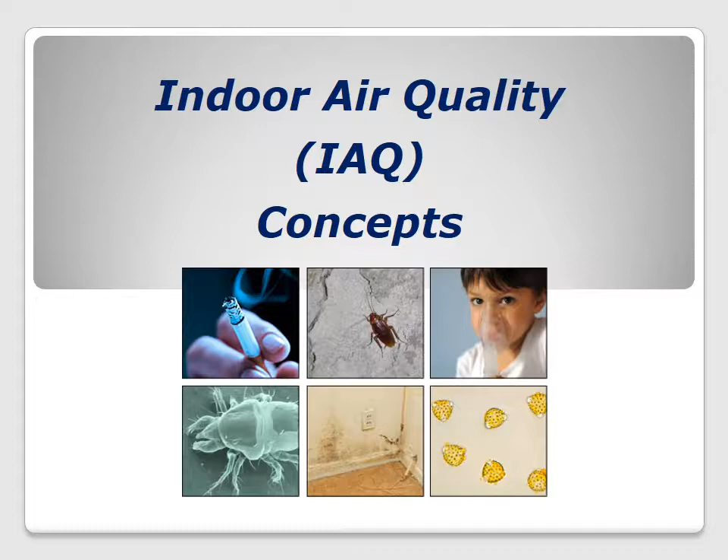In the last lesson, I quoted the stated purpose of ASHRAE Standard 62.2 2013. This standard defines the role of and minimum requirements for mechanical and natural ventilation systems and the building envelope intended to provide acceptable indoor air quality in low-rise residential buildings.

That's an interesting phrase in there. Acceptable indoor air quality. What does that mean?

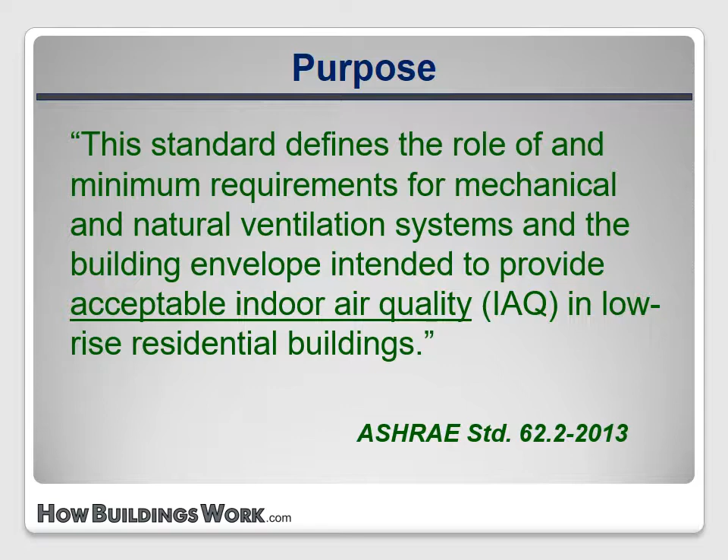Well, the standard defines it for us. It says acceptable indoor air quality is air toward which a substantial majority of occupants express no dissatisfaction with respect to odor and sensory irritation, and in which there are not likely to be contaminants at concentrations that are known to pose a health risk.

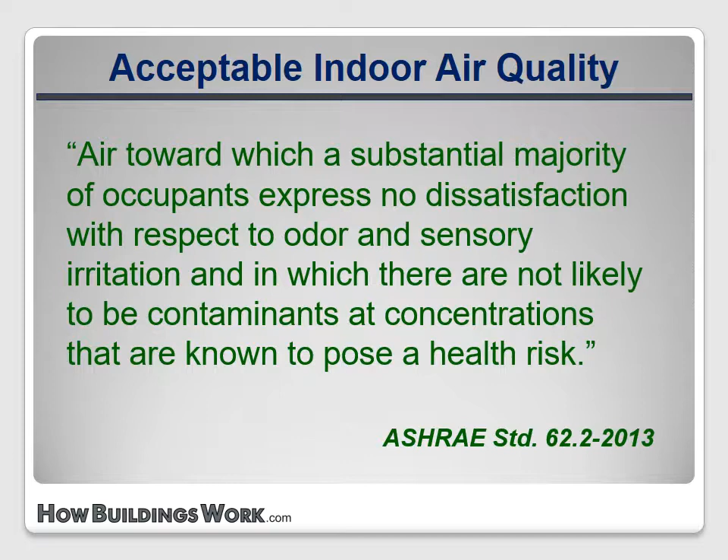That seems fair enough. But what causes dissatisfaction or irritation, and what are the contaminants that are known to cause a health risk?

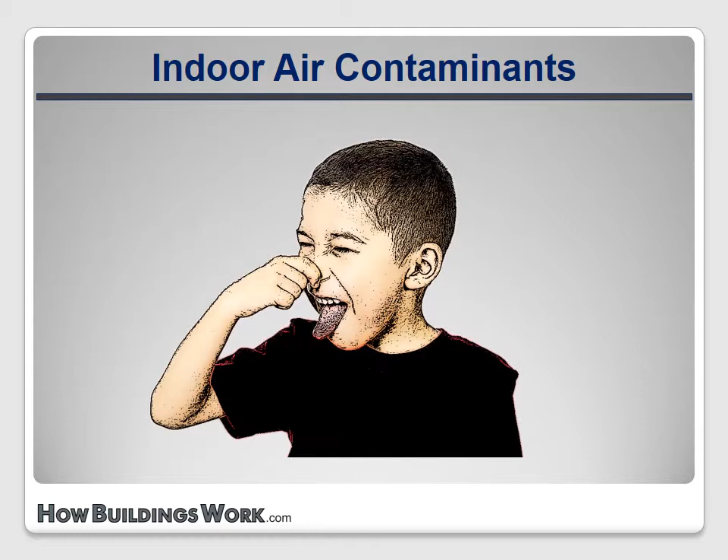Indoor air is generally less healthy and more objectionable to the occupants than outdoor air. That's because we add contaminants to it. We add moisture by cooking, bathing, and cleaning, and maybe from roof leaks and groundwater, and we even exhale and perspire moisture into the air.

We add household chemicals from cleaning, hobbies, and even off-gassing from furniture. We add dust and other particles like pet dander, and sometimes we add tobacco smoke or combustion byproducts from poorly vented or unvented appliances or from candles burning in the house. These are the things that cause dissatisfaction, irritation, and health risks.

So how do we keep the level of these contaminants low enough that they're not objectionable or unhealthy? Basically, it comes down to some simple concepts. First, we try to minimize the amount of them that get into the air in the first place. We call that source control.

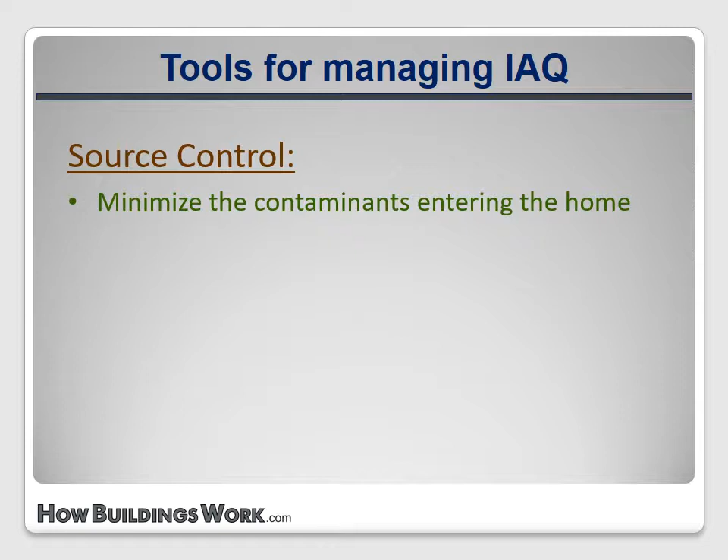Then, if they do get into the air, we remove some of that air from the house and replace it with fresh outdoor air. We call that ventilation. And finally, we can attempt to remove particulate from the air. We call that air purification or filtration.

ASHRAE 62.2 doesn't discuss source control very much. You can find that information in other places. It does discuss air filtration, and I'll review that in one of the lessons. But the primary focus of the standard is on ventilation. Most of the text covers ventilation rates, devices, and methods.

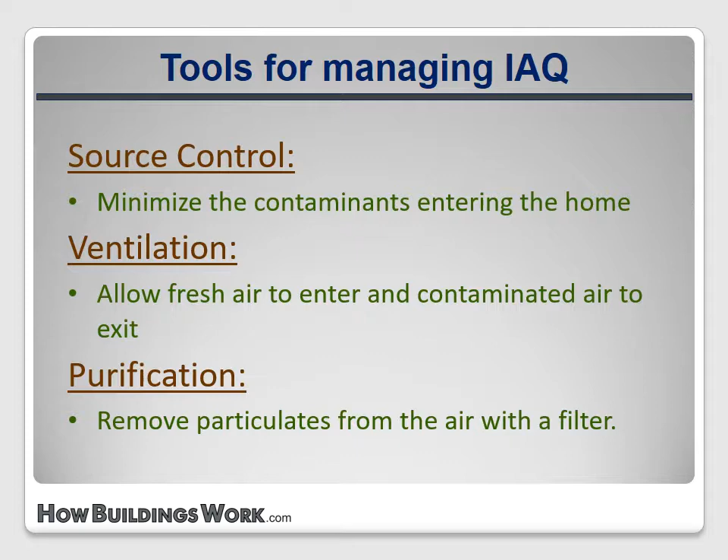When houses were built a century or more ago, the quality of the air depended on natural air leakage. Houses weren't sealed very tightly, and leakage carried stale, contaminated air out and fresh air in. But as time has progressed, we've built houses tighter for improved comfort and energy efficiency, and we've begun to add fans to provide additional air exchange.

We can divide these fans into two categories. Spot ventilation, which is called local exhaust in the standard, means exhaust fans that are located at the largest sources of contamination. This is usually bathrooms and kitchens. These fans run intermittently, only when the contaminants are being generated, and this is very common in houses today.

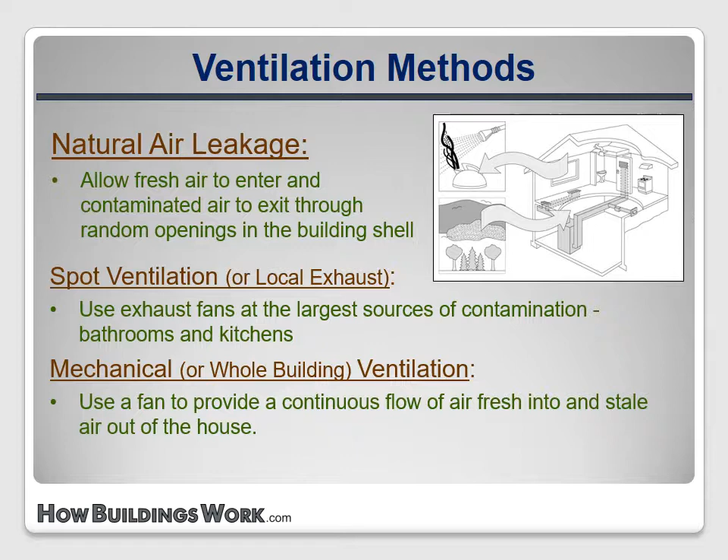Mechanical ventilation, which is called whole building ventilation in the standard, is less common. It means fans that run continuously, usually at a low flow rate, to provide air exchange for the entire house. Each of these types of ventilation has advantages and disadvantages.

Natural leakage is always present, and it doesn't require any occupant action to make it occur, but it varies with weather conditions, so there are times of the year when it provides little air exchange. The occupants have no ability to control the rate or timing to suit their needs, and they can't control where the air comes from. It might be coming up through a damp crawl space.

Local exhaust does very well at targeting big sources of contaminants, but it only runs when the occupants turn it on. If they don't use it regularly, it's not very effective.

Mechanical whole building ventilation provides constant year-round exchange, and it gives the occupant some control over the flow rate. But that's only if the occupants understand and use the system properly. In addition, mechanical devices are prone to failure and don't always get repaired promptly or correctly.

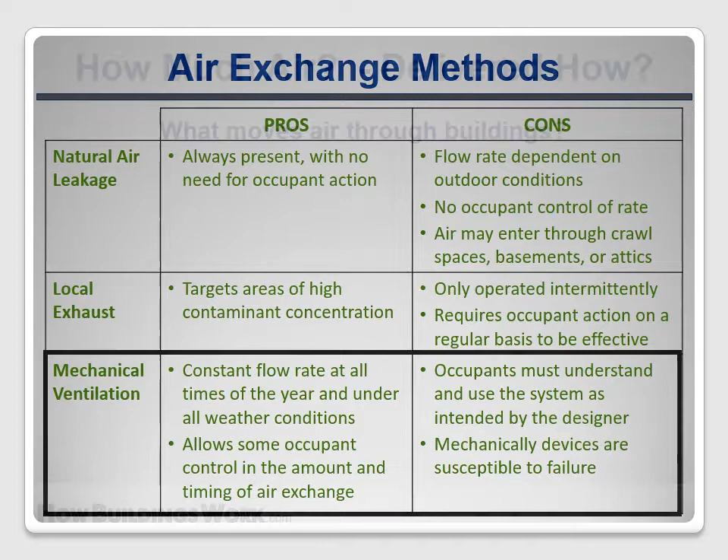To appreciate why mechanical ventilation is important, it's helpful to understand the different forces that push and pull air through houses. An obvious one is wind. Wind is moving air, so of course it will find its way in through leaks.

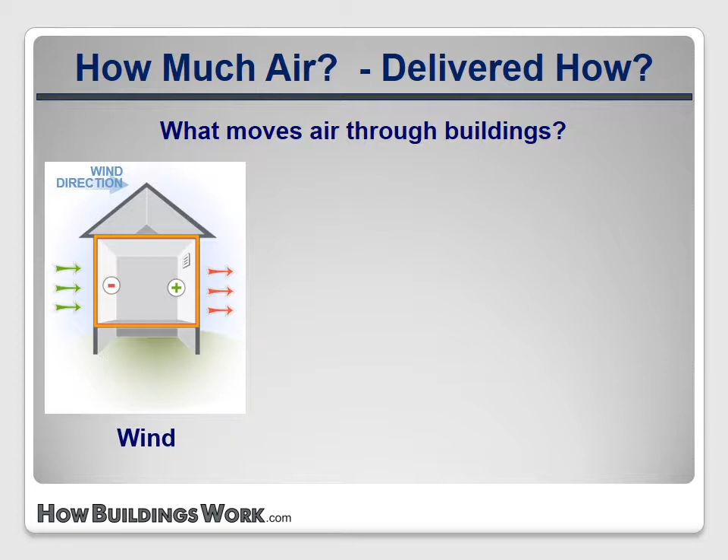Another is the buoyancy of warm air. Warm air is light, so it rises. When it's warm inside and cold outside, the house acts like a big chimney, with the warm air rising out of holes at the top.

And another is mechanical fans, which can push air out or pull it into a house. Mechanical fans are the most controllable of the three, and we can use them to ensure adequate airflow. Let's take a closer look at the other two to understand why they aren't as reliable.

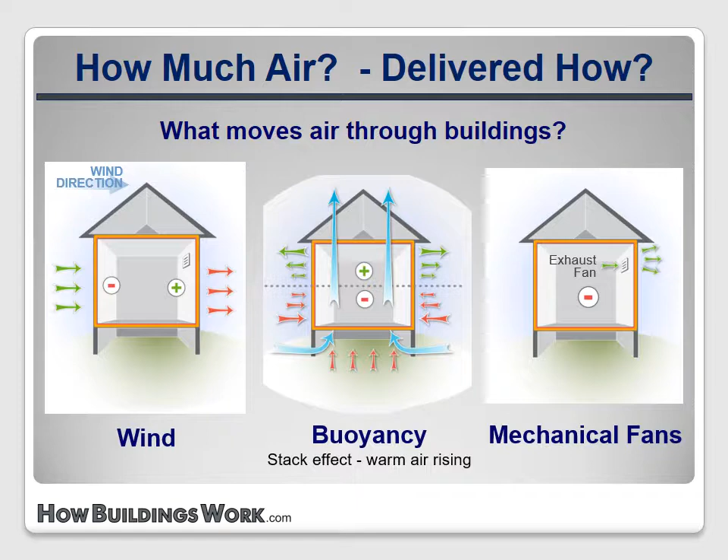When it's windy outside, that wind creates pressures around the house. It's fairly obvious that on the side the wind is coming from, the pressure pushes air into the house. But on the other side, where the wind wraps around, it creates suction that pulls air out. Somewhere in the middle of the house is a vertical neutral pressure plane that divides the intake and outlet sides. The two forces work together to accelerate air leakage. But this doesn't happen all the time—it only happens when there's a significant wind outside.

The buoyancy of warm air is a more significant factor, especially in cold climates. The warm air rises and creates a positive pressure at the top and pushes out of any openings. This creates a suction at the bottom of the house that draws cooler air in through openings down low. Again, there's a neutral pressure plane that divides the two, but this time it's horizontal.

This stack effect also doesn't happen all the time. It's highest in the winter, when it results in the biggest energy penalty, but it doesn't happen much at all in the warmer months. So there are significant periods through the year when these natural leakage forces don't do much to ventilate the house.

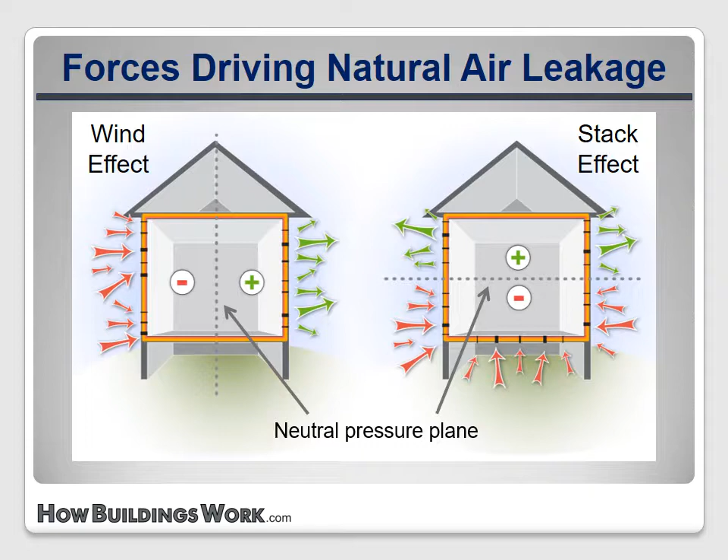This graph, adapted from a 2011 presentation by Paul Francisco, shows how natural air leakage varies with outdoor temperature. It shows a house with a desired ventilation rate of 50 CFM and a blower door reading of 2000 CFM at 50 pascals. When it's really cold outside, there's a lot of stack effect, and the house is overventilated. As the temperature outdoors goes up and approaches the indoor air temperature, the stack effect goes down and the air exchange rate drops. Of course, this is on average.

There may be some windy days where it goes up. Once the outdoor temperature is warm enough, occupants start opening windows, so there's a bit more air exchange, but it's still not enough to reach the desired rate. And when it gets really hot outside, there can be a reversal of the stack effect if the house is air conditioned, with cold air pushing out at the bottom.

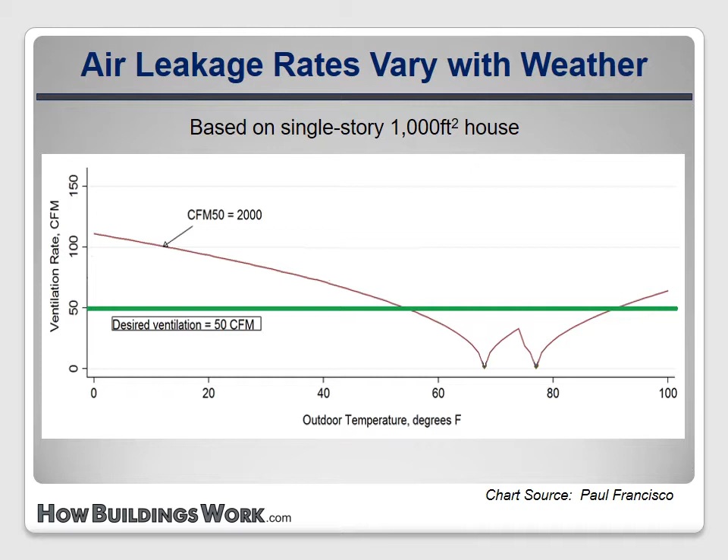From this chart, you can see that the house rarely gets the right amount of ventilation. It's usually either too much or it's too little. That's why we try to seal it tight and ventilate it right using mechanical fans.

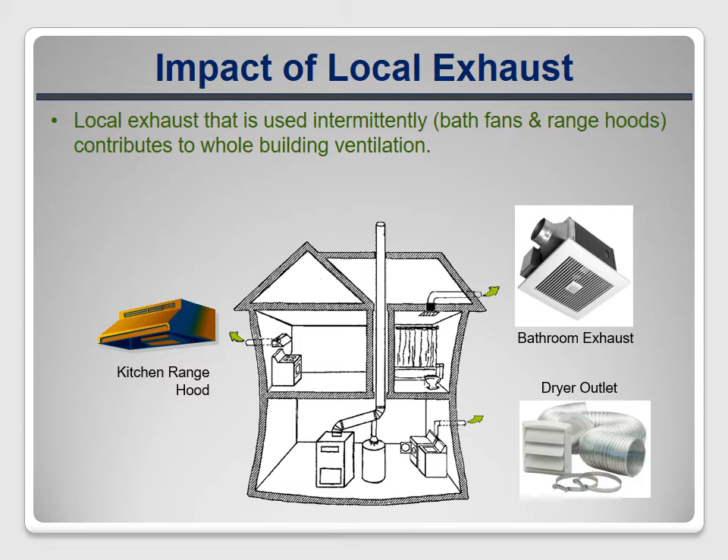And keep in mind that intermittent local exhaust also contributes to whole building ventilation. When these fans run, they increase the air exchange. So if they don't exist or they have low flow rates, the overall building ventilation suffers.

Now you understand the basic concepts. In the next two lessons, you'll learn how to calculate target whole building ventilation rates using ASHRAE Standard 62.2.